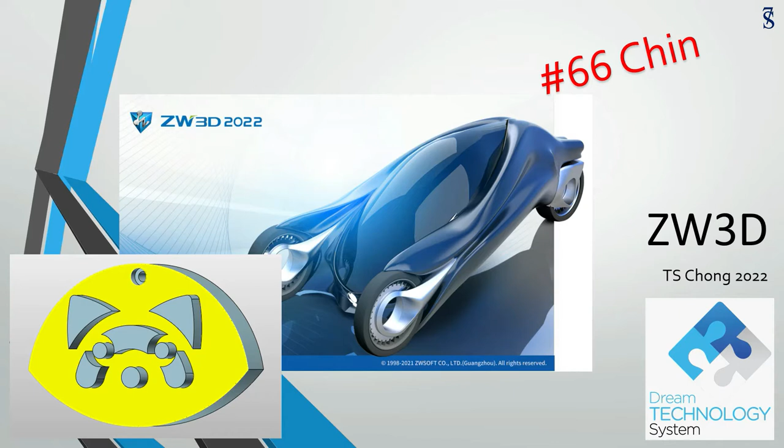As usual, we need to open the previous lesson file and continue what we're going to learn today. This is the result on the previous lesson. We have done the forehead, so we will continue using the same method, duplicate, to complete the chin area.

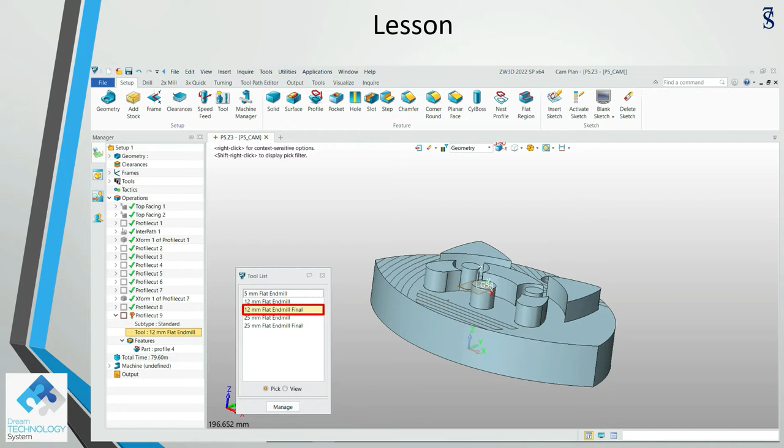Select, we need to change the tool, 12 mm flat end mill final, right mouse click, edit, change the bottom thickness to 0, change the color, calculate.

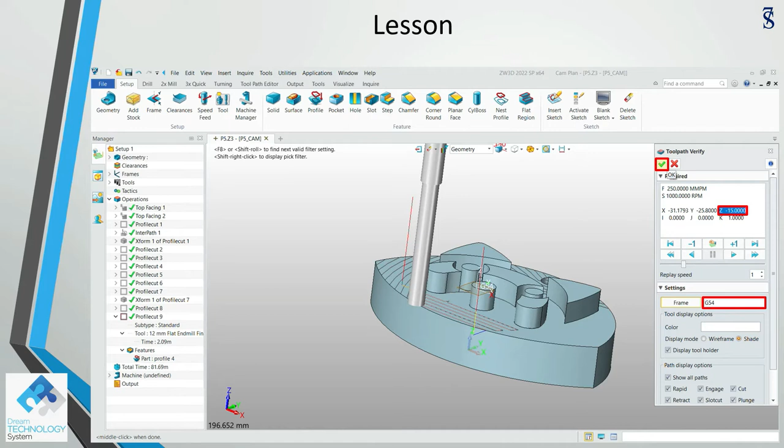Looks good, let us verify. Set the frame to G54, drag the tool, Z-15, looks good, OK, OK again. Let us go for solid verify, looks good, analysis visual, we have cut the chin area at the finishing level.

Save the file. Let me switch the screen to show you step by step how to accomplish the task. Welcome back. Let me show you step by step how to accomplish the task.

First, we double click the previous operation, collapse it, click profile cut number 3, duplicate, right mouse click, select, change to 12 mm flat end mill final, right mouse click, edit, change to 0, change the color.

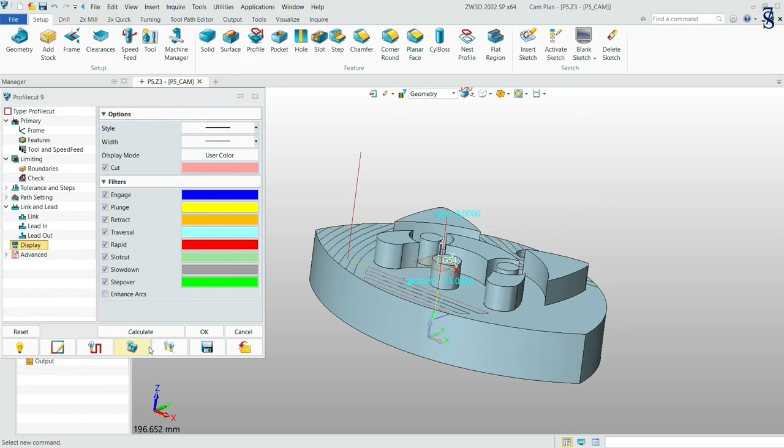Calculate, looks good, let us verify. Set the frame, drag the tool, yes, Z-15, click OK, OK again. Let us perform solid verify, slow down, play.

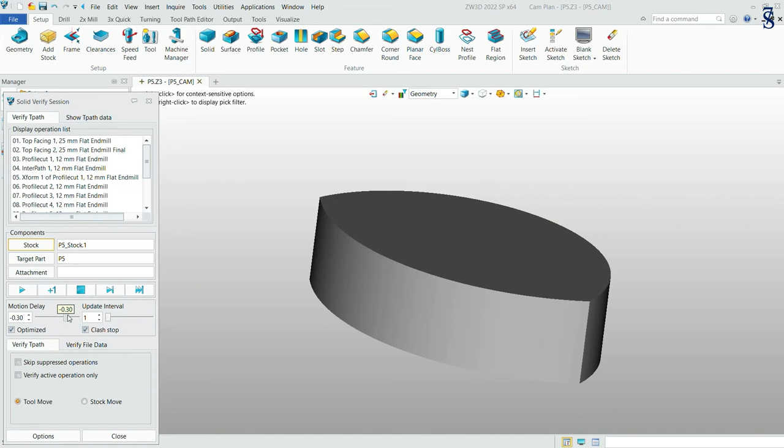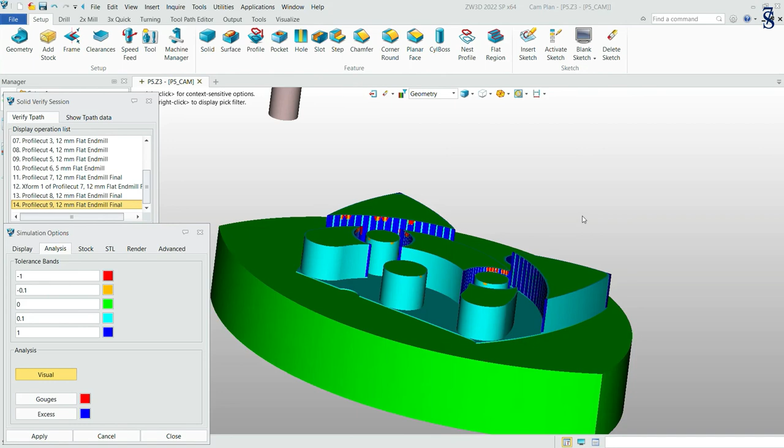Option, analysis visual, let's take a look. Looks good, this is what we expected. Close, close, we save the file.

Thank you for watching. We will continue to perform finishing operation on this part at the next lesson.